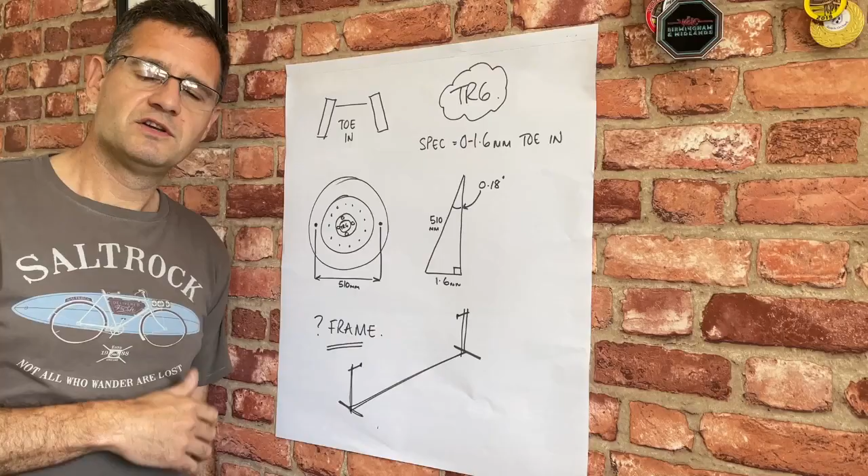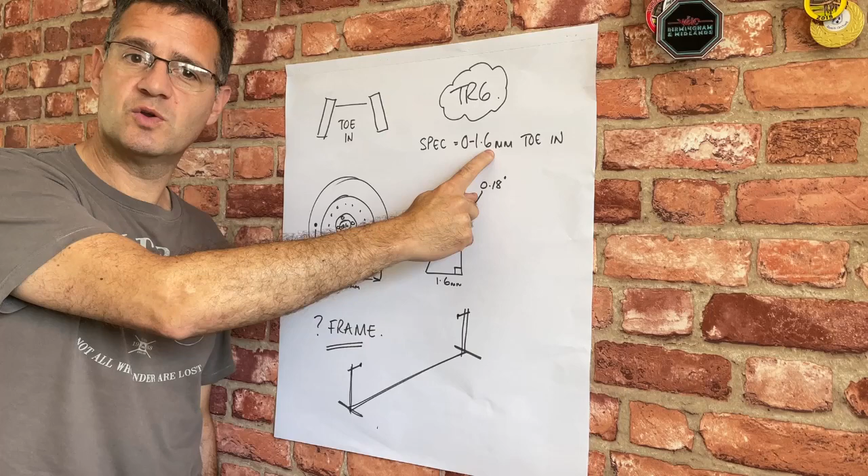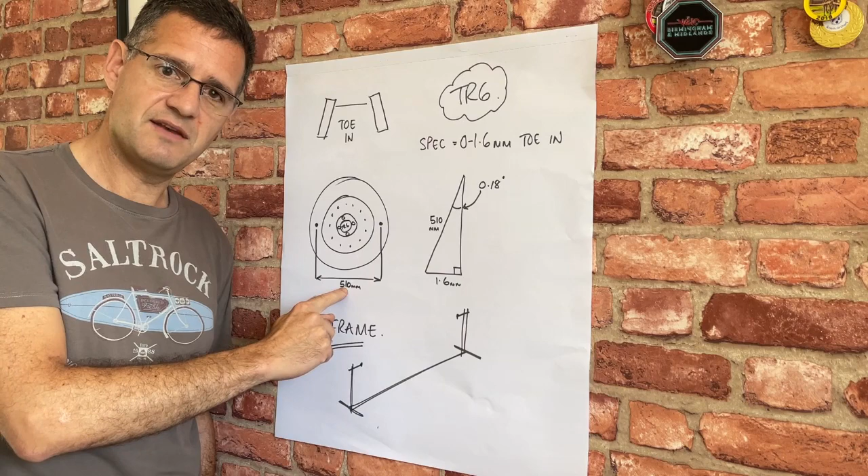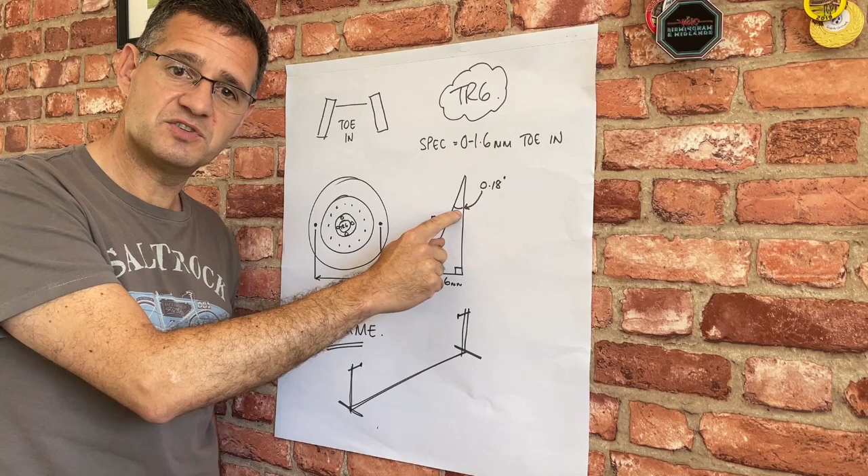Looking at the specification, I think there's a way. Let's have a look at the science. A car needs toe-in in order to track squarely and straightly. The TR6 specification is 0 to 1.6 millimeters of toe-in. But the question is, over what distance is that 1.6 millimeters? Because the further out we go in terms of the angle, the bigger that becomes. The specification is to the furthest outward points on the tyre. On my wheel, the furthest outward points on the tyre are 510 millimeters, or 51 centimeters, apart. So if we do some trigonometry, looking at 1.6 millimeters over a 510 millimeter distance, that's an angle of 0.18 degrees. So the specification is virtually parallel, to 0.18 degrees of toe-in.

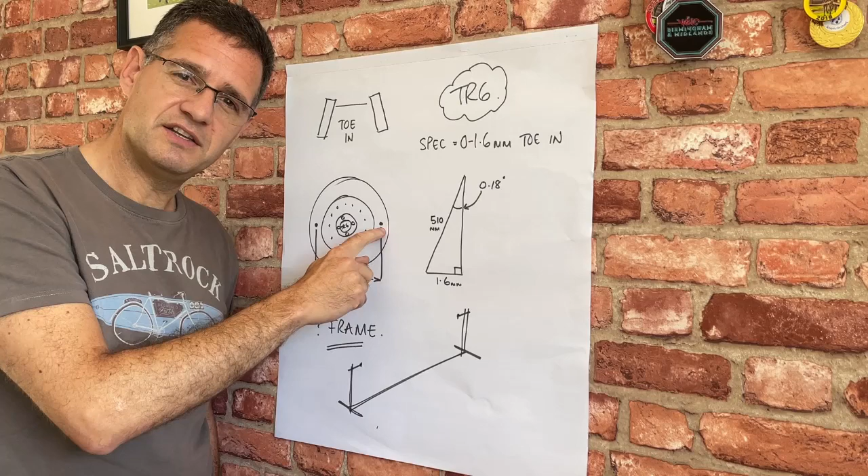The challenge is, how am I going to measure that? How can I measure these points on the tyre at its furthest out point? So what I'm going to do is build a frame. If I build a metal frame that can sit underneath the car and use some all-thread to touch these points on the tyre, I can measure at the furthest point and then identify and measure my gap between the tyres, the highest point and the lowest point, to that 1.6 millimeters.

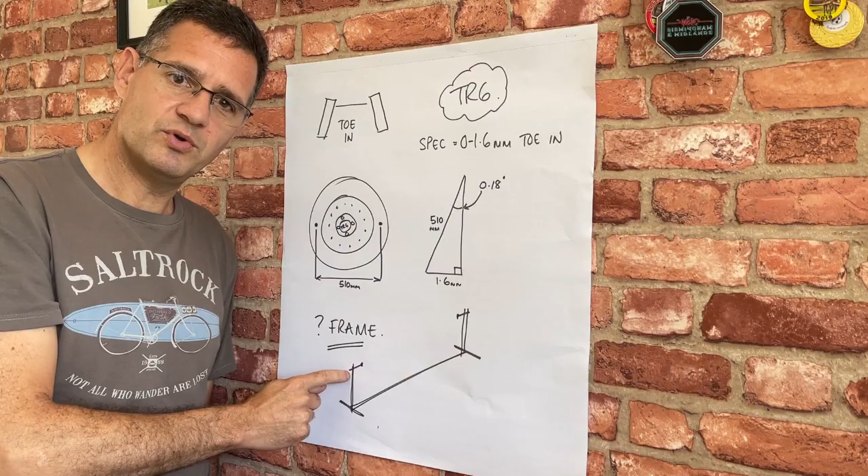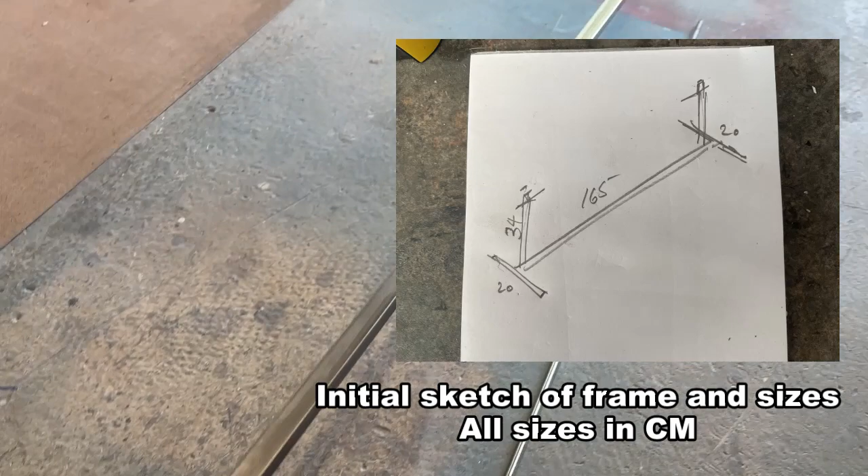So we've got our materials here. Let's have a closer look at what we've got. We've got M8 all-thread bar, and I'll be using 16 by 16 by 1 millimeter steel square tube, this piece here is 2.5 meters long. So let's get that chopped up to size.

And now, with our materials cut to size, we can get the welder out.

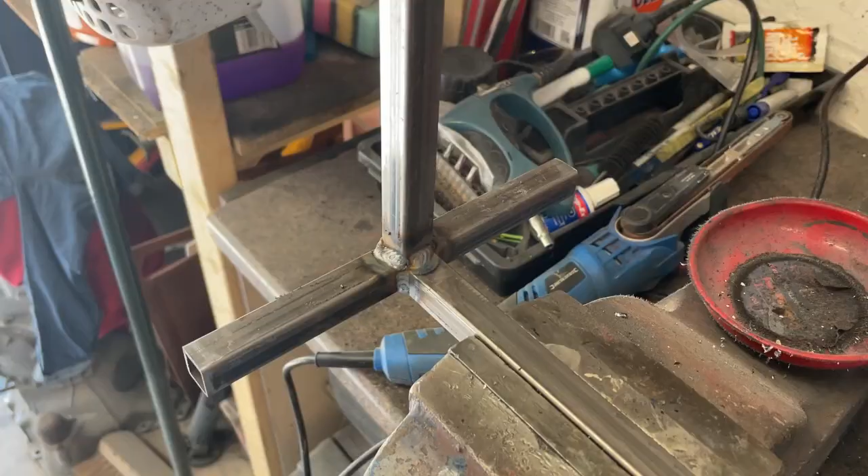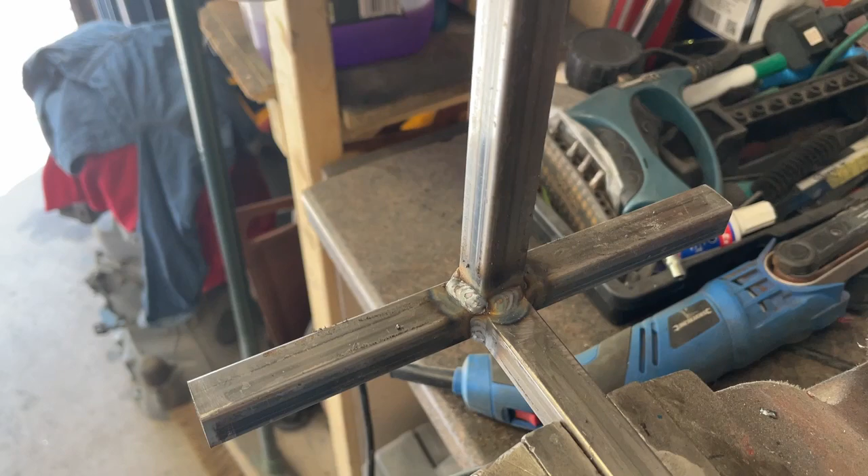Now we've got our finished joint at the end of our rod. We've got our support, so it'll rest on the floor in the correct way, and I've welded on the vertical post. I've drilled a hole here at 31 centimeters above the floor, which should rest nicely halfway up the tyre. All we need to do now is repeat the process on the other side, and then we'll have our finished frame.

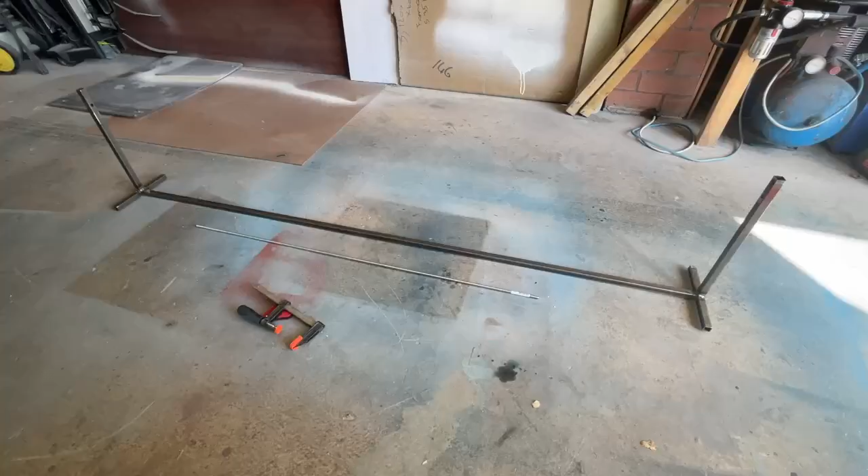And there is our finished welded frame. If we zoom in so you can have a closer look, what I've done there is I've got the support so it sits flat on the floor. This concrete floor is not quite perfectly flat, but that'll be fine. It'll stop it rocking over.

We've got our vertical post, and we've got our hole here for our M8 all-thread at 31 centimeters high. So next thing to do is to get the car in and offer that up so we can cut the all-thread to size.

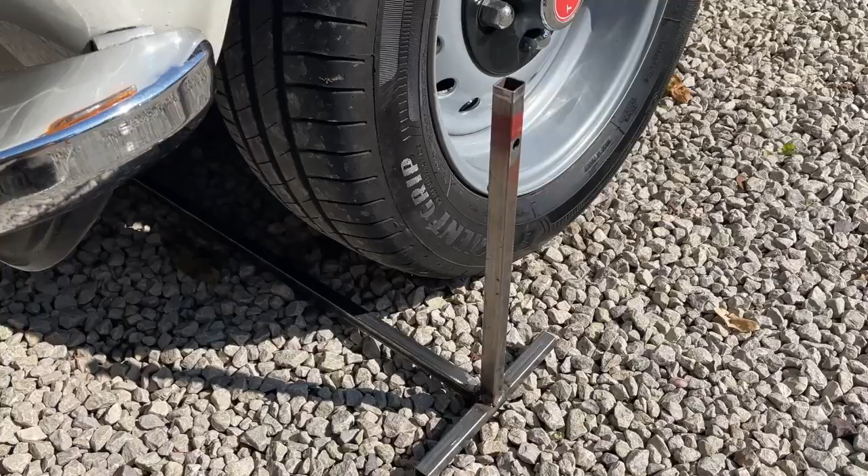And there, with our frame in place now, if I put the all-thread through, you can see that I probably need about 12-13 centimeters for each side. So let's get that cut to size, get some mounting nuts on, and then we're ready to go.

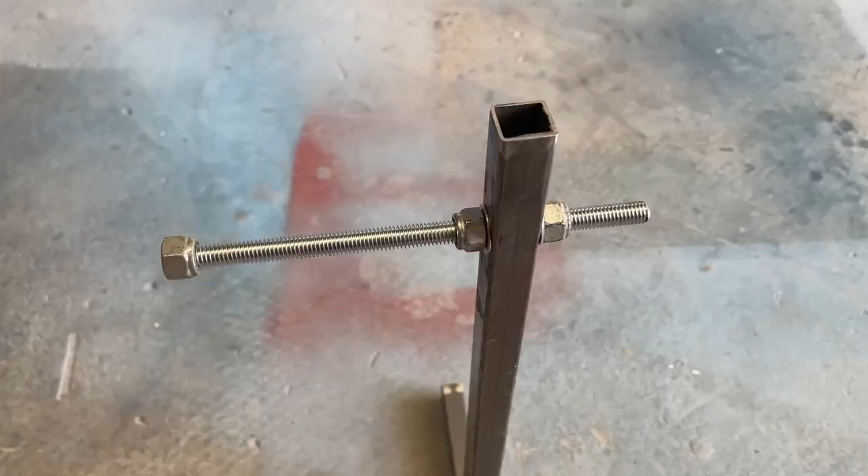Final design then, with the all-thread through, 2 nylock nuts to hold that in position, and I've put a nylock nut in reverse at the end, so we've got a flat surface to butt up against the tyre. So let's get it up against the car and see what we've got.

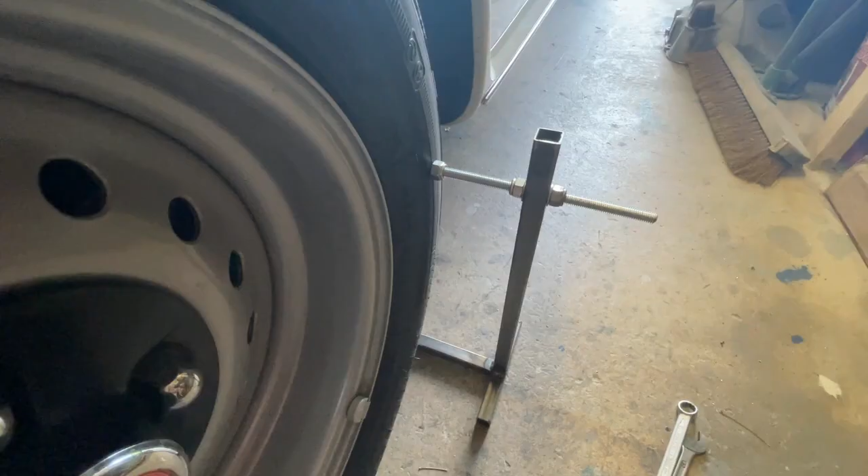So step one, I've put my frame underneath the car. One thing to note is I've had to just trim slightly down the supporting bracket to get it underneath the car, but managed to do that, and it's still stable, which is good. I've adjusted the all-thread here so it just kisses on the tyre on both sides, very slightly touches there. So now I've got my distance, 31 centimeters up, in the center of the furthest out point on the tyre.

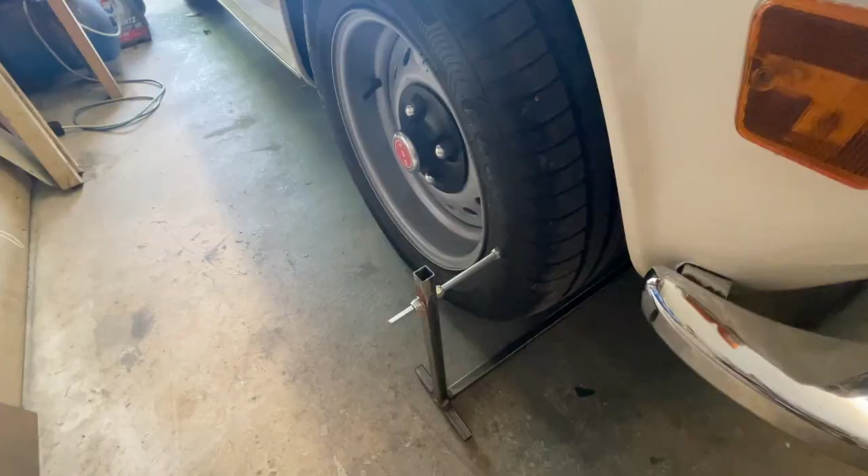So now, without adjusting the all-thread, I'm going to move the frame to the front, and we'll see what gap we've got to see if we've got toe-in or toe-out. So I've got the frame set up on the front of the car here. You can see it's just kissing the tyre in the centre, at its furthest out point.

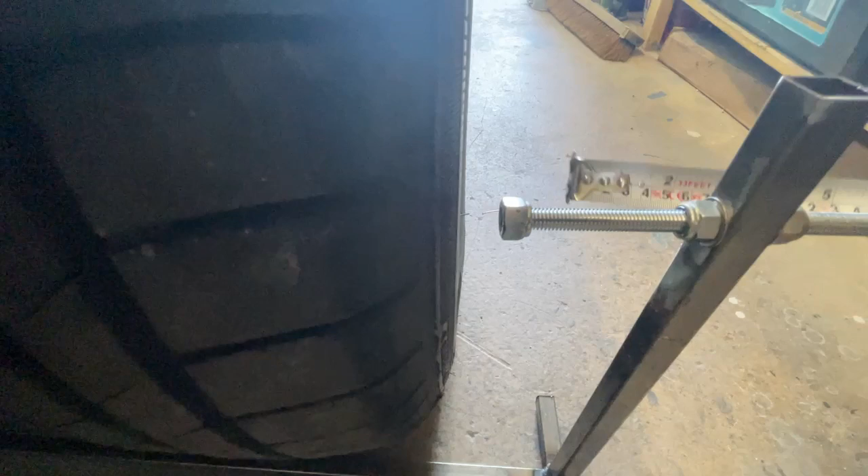And if I come round to the other side of the car, you can see that I've got quite a considerable gap. Remember, the specification should be 0 to 1.6 millimeters either side. I've got a total gap of 15 millimeters. So 1.6 plus 1.6 is 3.2. I've got nearly 12 millimeters of toe-in more than I should have.

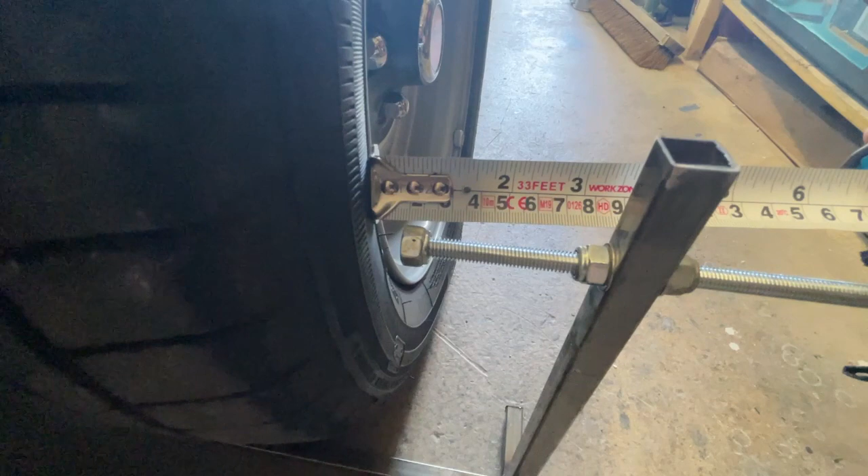And I'm not unduly surprised. It's a brand new rack on this car. It hasn't been adjusted or set previously. So that explains why I've got such a big difference, as I've only set it up initially by eye.

So the next thing to do is look at adjusting the rack. I've got a 15 millimeter gap. The maximum specification is 3 millimeters, so I've got 12 millimeters to reduce. That's 6 millimeters each side, and for every millimeter I change, in theory it's going to change 2, because as the front of the wheel comes out, the back of the wheel is going to go in. So I need to make a 3 millimeter adjustment on my steering rack.

Now I'm fortunate that this car tracks straight and square anyway. The steering wheel is in the right position. It's not pulling to the left or pulling to the right. So what I need to do is take 3 millimeters off each side of the steering rack.

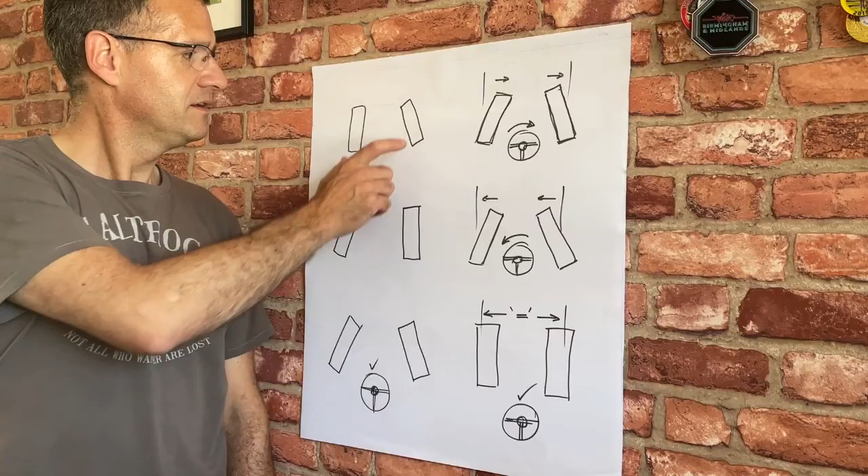If you want to adjust the position of your steering wheel, make it move to the left or to the right to become square, we have to adjust one or the other of the tie rods more or less. And to understand what we need to do, we need a little bit more science. So if we have this condition and we adjust only one wheel, what will happen is, as the wheels try to square themselves up when they drive, your steering wheel will now be moved over to the right.

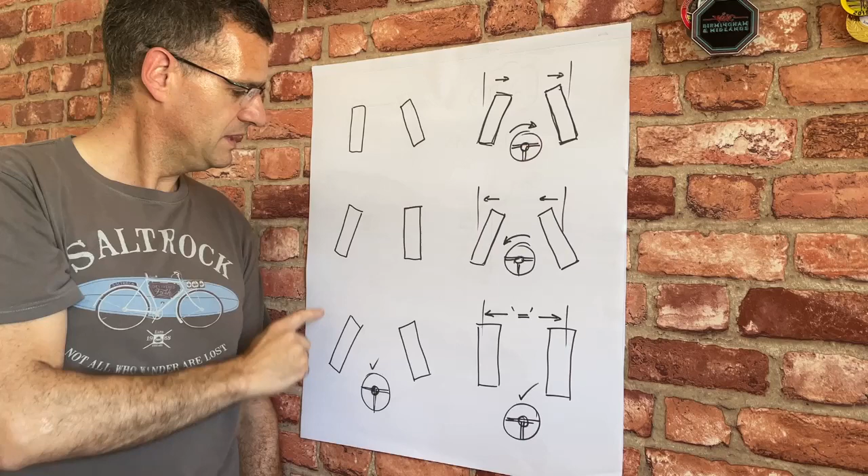It will be turned right. If we only adjust one wheel on the left-hand side, then as the wheels square up in order to track true, the steering wheel will turn to the left.

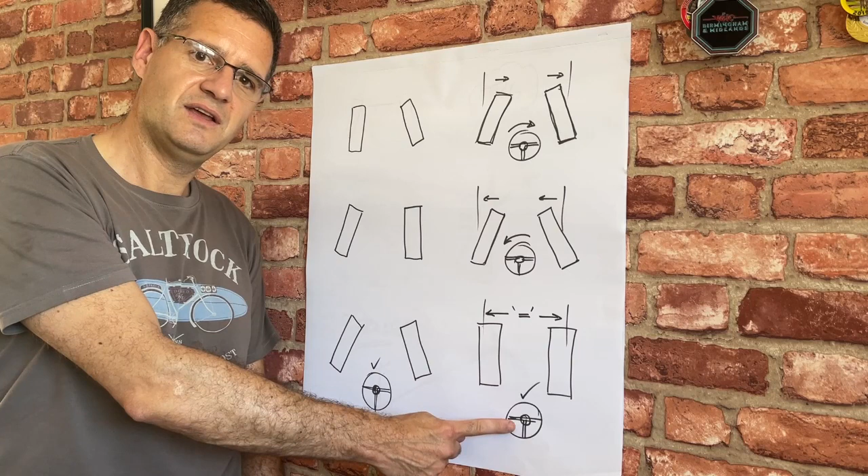My steering wheel is in a good position, but I have too much toe in. So what I need to do is adjust my track rods equally so they go out, and hence I can maintain my square steering wheel position. So as I need to decrease the amount of toe in, and because the steering rack is on the front, what I actually need to do is take the tie rods outwards.

So what I'm going to do is take the tie rods outwards around 3 millimeters, and as the pitch of the thread is about 1 millimeter each, I'm going to take it out 3 complete turns of the rack and then measure again.

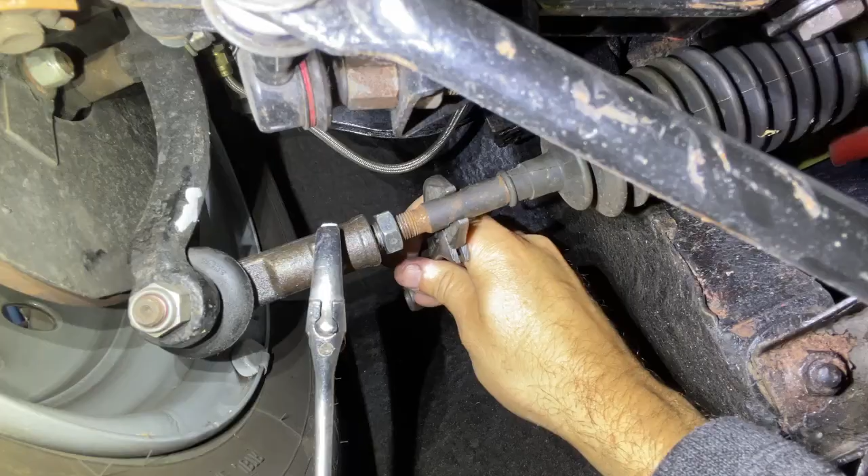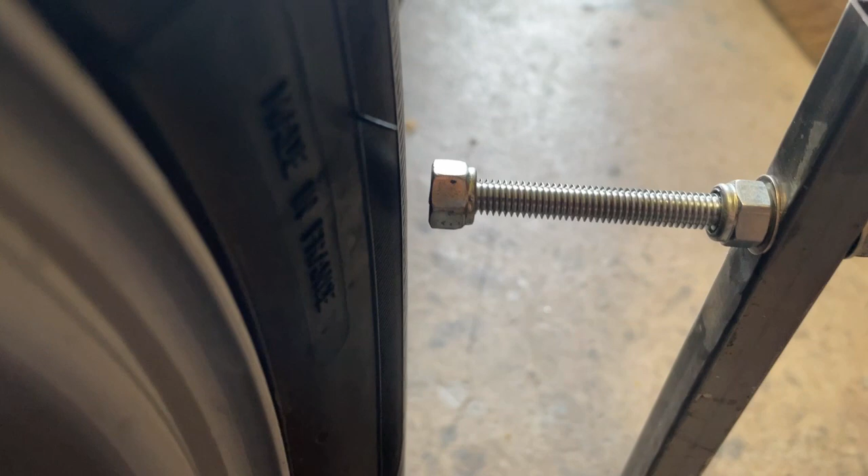So now with the steering rack adjusted, let's move the car back and forward just to settle the suspension and measure again. So now with the bracket on the rear of the front wheel, we've now got a gap, and that's some 5 or 6 millimeters. So that's a good sign. That's showing that the rear has gone in and therefore the front will have gone out.

So what I'm going to do is adjust this bracket so that it just kisses the tyre, and then we'll transfer it to the front and see what effect we've had.

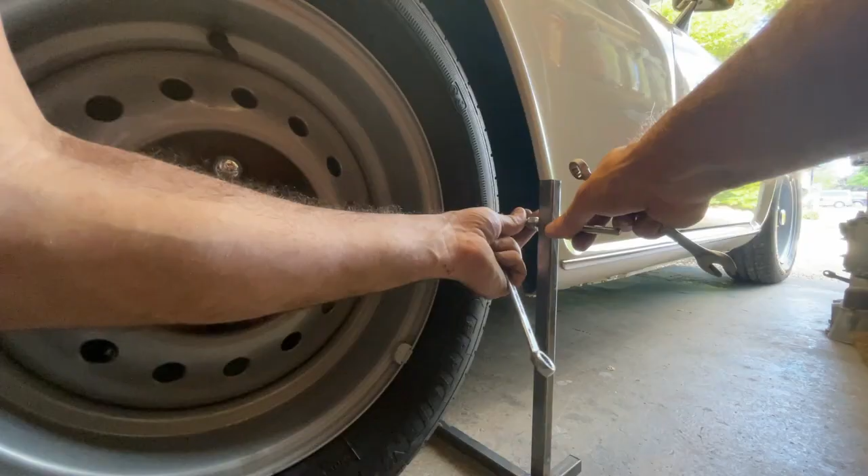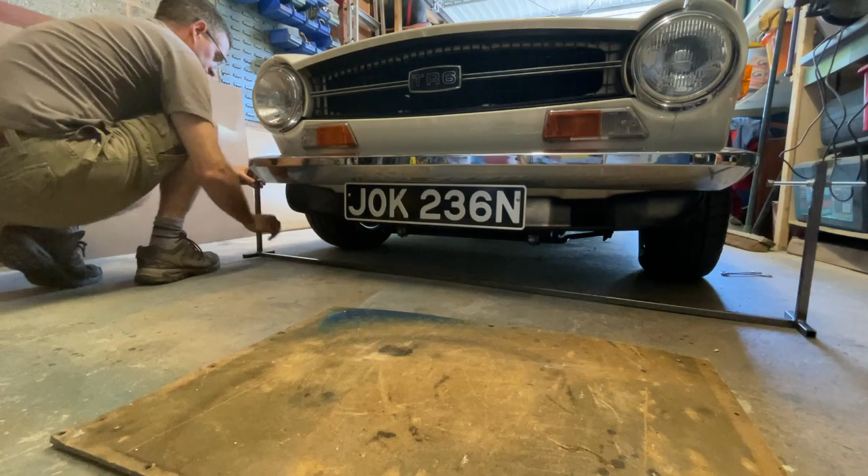Okay, so now we can see we've got about 15 millimeters overlap the other way now. So clearly I've made the adjustment twice as much as what I needed to do. So what I'm going to do now is increase the toe in by half amount as I did last time, and that should get me somewhere near where I want to be.

So another adjustment later and things are looking good. After adjustment and measuring the back, I bring it to the front and I'm just kissing the tyre on this side, and when we go to the front opposite side, you can see here the gap on the other side is around 1 millimeter. Now remember, the specification is 0 to 1.6 each side, so that's 0 to 3 millimeters, which is quite an adjustment, but I've got less than that. I'm within the range. I've adjusted both track rods simultaneously, so my steering should still be straight.

So now any further adjustments will be made following test drives with very minor tweaks just to make final adjustments. But what I do know is that my toe in is now within specification. So it's a crude adjustment. It isn't for everybody, but what I have done is be able to set the toe in to within specification. In my own garage, I now have a tool I can use for the future, and I've done it for only a few dollars, as opposed to taking it to the shop where I'd be paying labour rates on top.